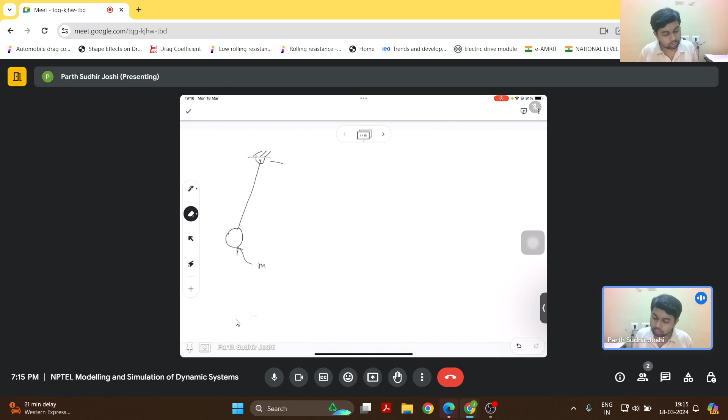Let us first try to derive the equations of motion for this simple pendulum in the most generalized form. Let us draw the free body diagram of this simple pendulum. The forces acting on this pendulum will be the weight of the pendulum and the tension acting in the rod or string by which the pendulum is suspended. Let us say the pendulum makes an angle theta with respect to the vertical. Now we apply Newton's second law to this system.

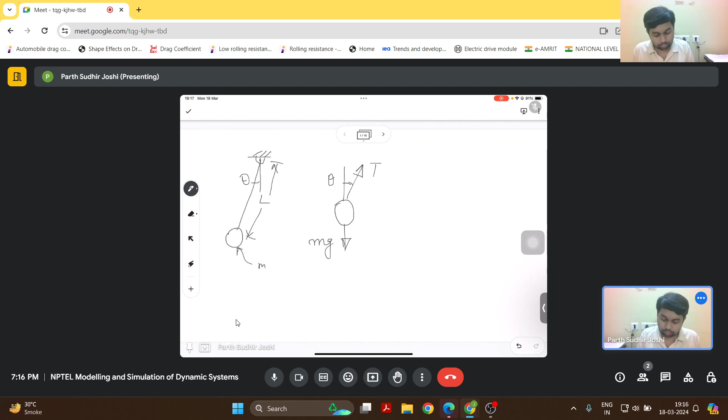So when we apply Newton's second law, what we say is that summation of net forces is basically... now see, this is the usual Newton's second law.

Now we could also apply a further version of this similar Newton's second law, where we consider the moment. So the net moment acting about a certain point is basically the rate of change of angular momentum.

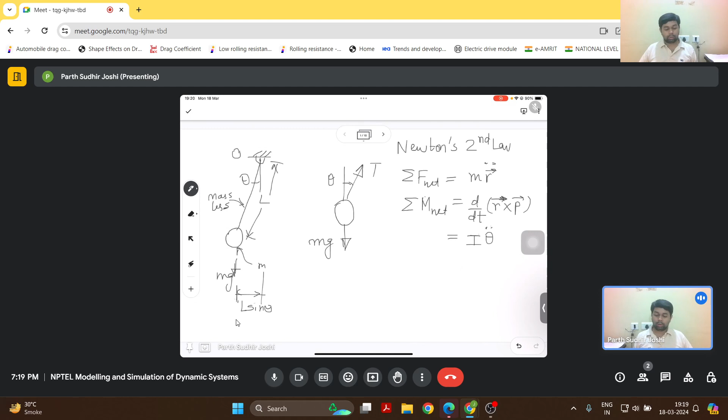So then the moment of the force mg will be basically mg into L sine theta. So it will be basically minus I theta double dot, because since our theta is in clockwise direction and this moment is in anti-clockwise direction, the signs of these both quantities will be opposite.

Now what will be the moment of inertia I about this point O? It will be basically this point mass m into L square into theta double dot. So now if we further simplify this differential equation, we get minus g by L sine theta is equal to theta double dot, or theta double dot plus g by L sine theta is equal to 0. So now this is the general form of the differential equation for this.

Now generally what we do is that we assume that sine theta is nearly equal to theta for small angles. Now this small angle approximation is in fact a linearization of this differential equation, because once we assume this to be a small angle, I'll just rewrite the differential equation now.

So theta double dot plus g by L sine theta is equal to 0, and if we assume that sine theta is nearly theta, then this differential equation will transform into theta double dot plus g by L theta is equal to 0. So then this is a linear second order ordinary differential equation. Now this approximation is valid only for small angles.

So when we linearize a differential equation about a certain operating point, that operating point is generally a certain equilibrium condition for this system. So now the equilibrium condition for a simple pendulum is either theta equal to 0, or it can be theta equal to 180 degrees. So in both of these conditions, the pendulum is in equilibrium.

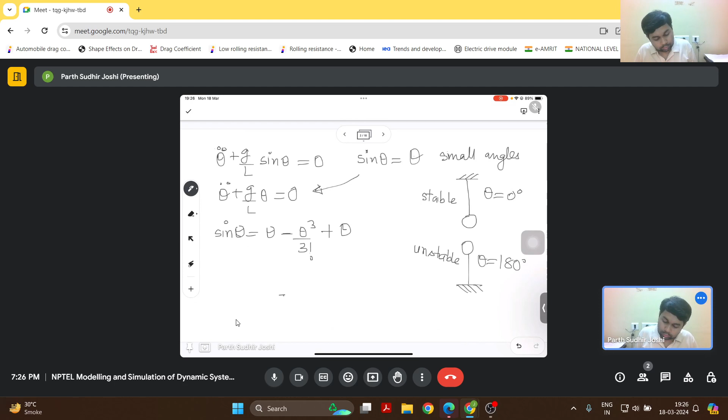So now if we write down the series for sine theta as a power series, what we get is sine theta is theta minus theta raised to 3 by 3 factorial, plus theta raised to 5 by 5 factorial, and so on. So this is the usual series that we get for sine theta. Now if we neglect the higher order terms, what we get is originally what we consider as our small angle approximation, sine theta is nearly equal to theta.

So this is how we actually get that approximation, and then this differential equation becomes linear. So that is an example of how we linearize our differential equation about our operating point. So this is one simple example which I wanted to cover, because this is something we have been familiar with since a long time. So hopefully that will help you understand this better.

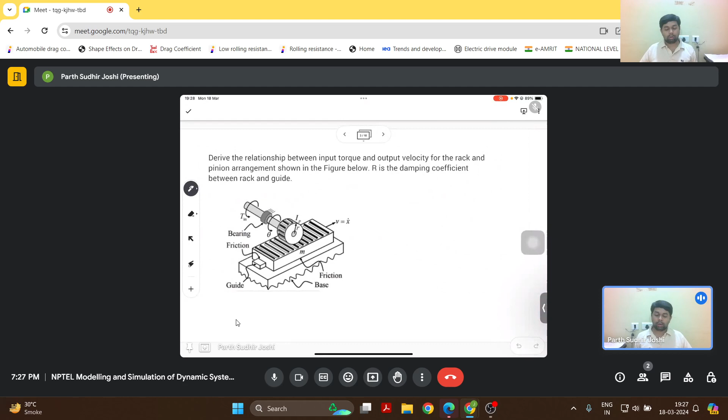So let us now move on to our next problem. In this problem we have been given a rack and pinion mechanism, and we have been asked to derive the relationship between the input torque and the output velocity for the rack and pinion arrangement. It has been given that R is the damping coefficient between the rack and guide.

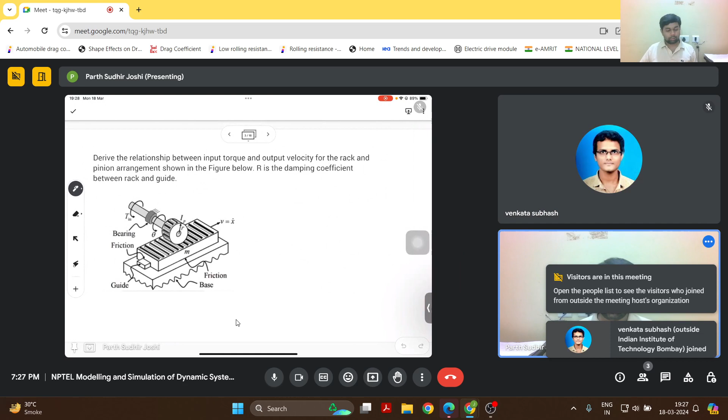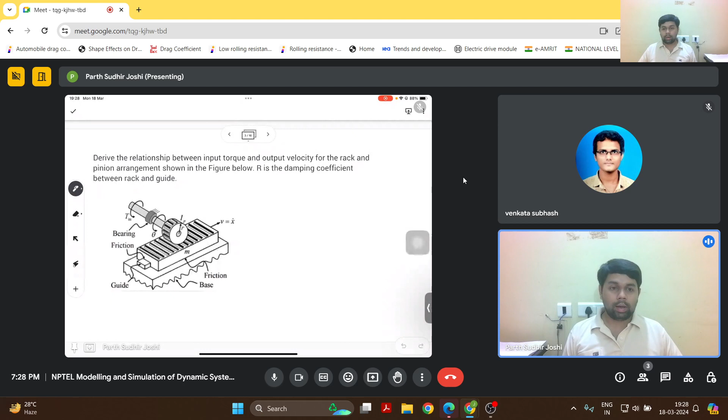Since no one had actually joined this session, I had just started with one simple problem, and I had started recording this session.

What I had covered is basically an example of a simple pendulum, and I had explained the derivation of how do we derive the differential equation for this simple pendulum mechanism, and then derive the equation in its most general form, which is theta double dot plus g by L sine theta.

Then how do we basically come to the usual small angle approximation for the simple pendulum. We may not have realized earlier, but that is in fact how we linearize that differential equation about a certain operating point. In this case, our operating point is one of the equilibrium positions of the simple pendulum. We have two equilibrium positions, which are 0 degrees and 180 degrees.

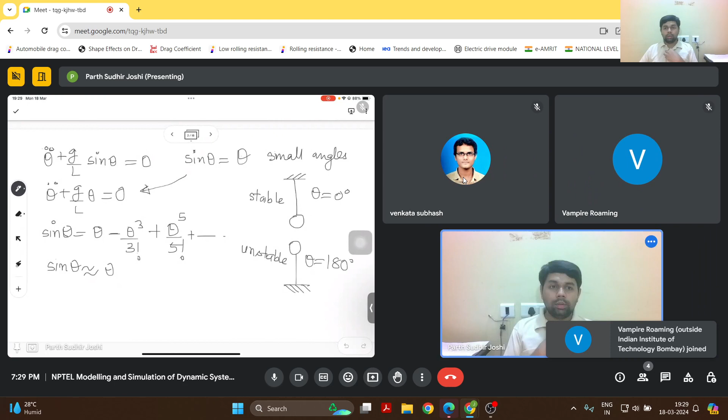One of them is a stable equilibrium position and another is unstable. We consider the case of 0 degrees as a stable equilibrium position, and if we now write down sine theta in the form of a series, we get sine theta as shown. If we neglect the higher order terms, we get the small angle approximation of sine theta nearly equal to theta, by which we now have linearized our differential equation about theta equal to 0 degrees. That is an example how we can linearize simple systems.

Sir, I have a small doubt, sir. Can I ask? Yes, yes. In the second step, you wrote sin theta is equal to theta, no sir? Which one? In the second step, sir, you have written the arrow mark. Yes, sir, which one? You mean this part here? That arrow mark. Yes, sir. Sin theta is equal to theta.

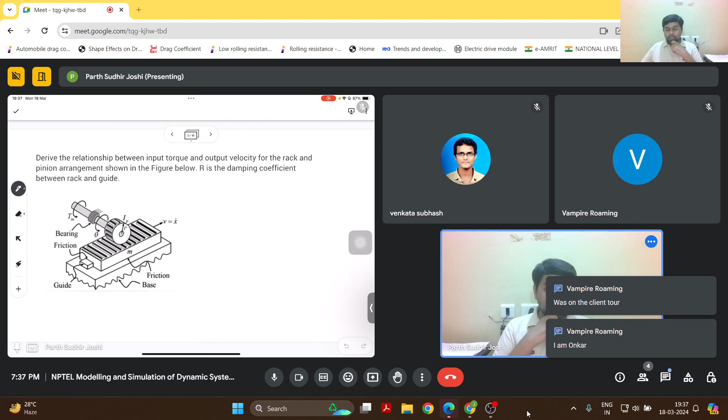So your name actually shows something like 'vampire roaming'. What is actually your name? Okay, your name is Onkar. Okay, fine. So are you a BTech or MTech, or are you a student, or working in industry?

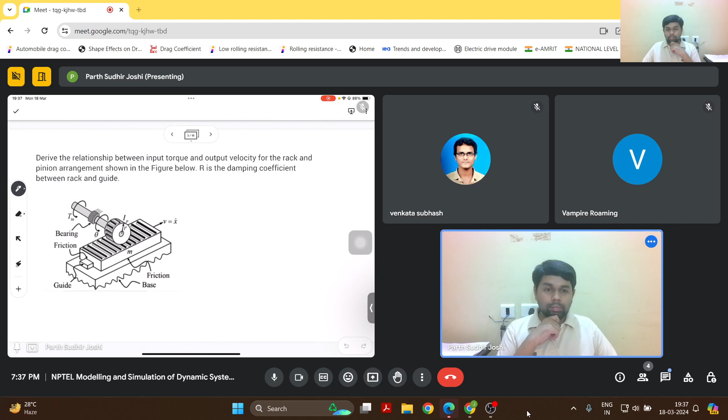So you have already done your masters in design engineering. Okay, great, from BITS Pilani. Okay fine, even I did my undergrad from BITS Pilani. And are you working in industry somewhere? You are working, okay. So you are from a mechanical engineering background itself?

Oh, last 22 years, okay great. So then you are much older than me. Okay great, so great to have you, Mr. Onkar.

And what about you? Okay, so you did your master's in 2022. From which institute did you do your master's? You just mentioned BITS Pilani, right? Sorry, yeah, thanks. So great to have you on board.

And regarding Mr. Venkata Subhash, are you currently studying or working somewhere? So you are working, okay. Have you completed your masters? So Mr. Venkata Subhash, have you completed your masters? Okay, so you are a faculty in mechanical engineering. Okay fine, so are you doing your PhD or have you completed it?

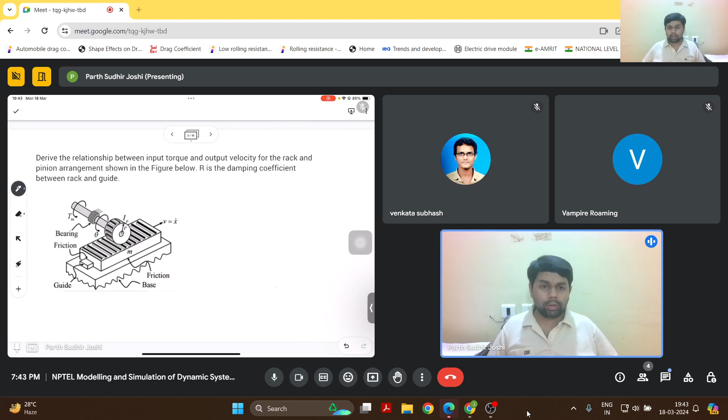Yeah, so I'll provide you my email ID, and then we can discuss separately what exactly you were not able to understand. So please go through that video. In the initial part of the video, I have tried to explain some of the basic concepts, and then some problems have been covered. Hopefully that should help clear some of your doubts, and if there are more doubts left, we can discuss separately over email.

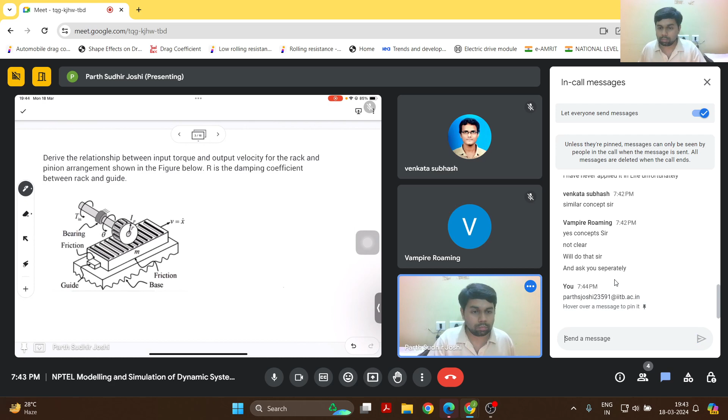So I think we might cover Simulink also to some extent later on. Right now we are just covering the basic theory related to system modeling. Towards the later part of the course, I think we will be covering some examples using MATLAB as well as Simulink. I can also separately cover Simulink and some examples if you are interested, even if that is not part of the course.

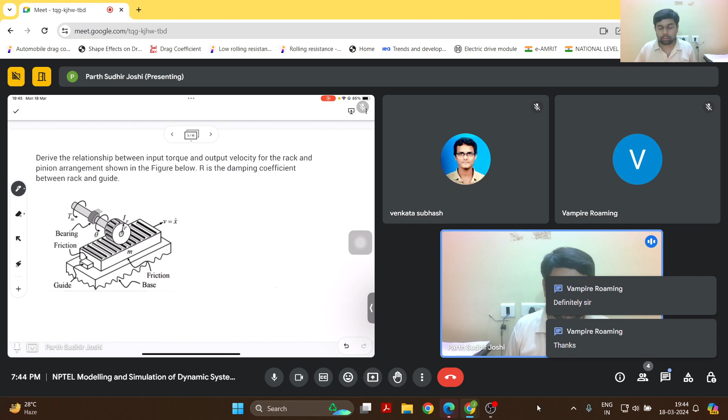Sure. Yeah, welcome. So fine. Anything else? Anyone had anything else to say?

Fine. So then we can start with this problem, which is related to modeling mechanical systems. Here we have a rack and pinion mechanism. Some electric motor is running the pinion, providing an input torque T in to the pinion, and this pinion is in contact with a rack installed over a guideway. There is friction between the guideways, so R is the coefficient of viscous damping or viscous friction between the rack and guide.

Now we have to derive the relationship between the input torque and the output velocity for the rack and pinion arrangement. So how do we start with this problem? We first consider each component separately. We first consider the pinion, find the net torque acting on it, and then apply Newton's second law. So if this is the pinion, it's given that there is some input torque T in. We also assume there is some net output torque that the pinion is able to provide.

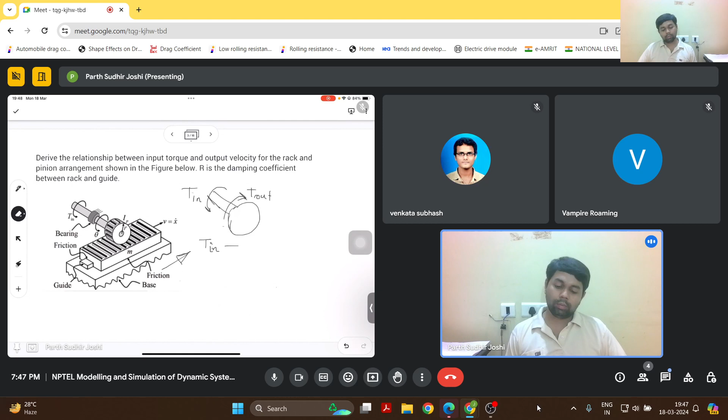So we can write down the differential equation. The direction of this output torque will be reversed, because since the pinion is pushing the rack forward in this direction, it's providing a force in this direction. As a reaction, the reaction force acting on the pinion will be in this direction, which will cause a reverse torque in a clockwise direction with respect to the axis of the pinion. So we can write down the equation of motion for this pinion.

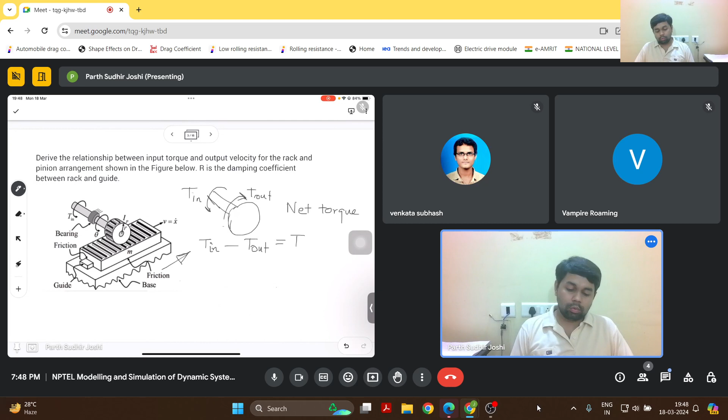So the net torque acting on this pinion will be the moment of inertia of this pinion about its axis times the rate of change of angular velocity. Now, let us say this force acting on the rack because of this pinion, let us call this F.

We can write down this force in terms of the torque applied by the pinion onto this rack. So this force times the radius of this pinion will be equal to the net output torque acting at the pinion. So let us call that force F. Now if we draw the free body diagram of the rack, so let me draw this.

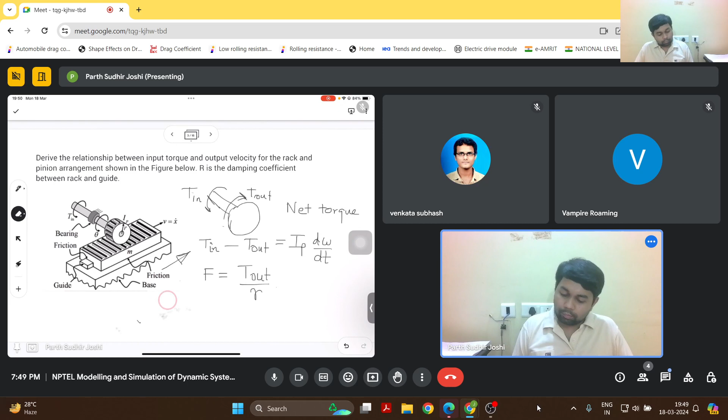So then there will be a friction force which is, since the velocity is in this direction, the friction force will be opposite to the velocity, which is basically R into the velocity v, and there is a force F which is acting because of the pinion. So there will be this force acting on the rack, and

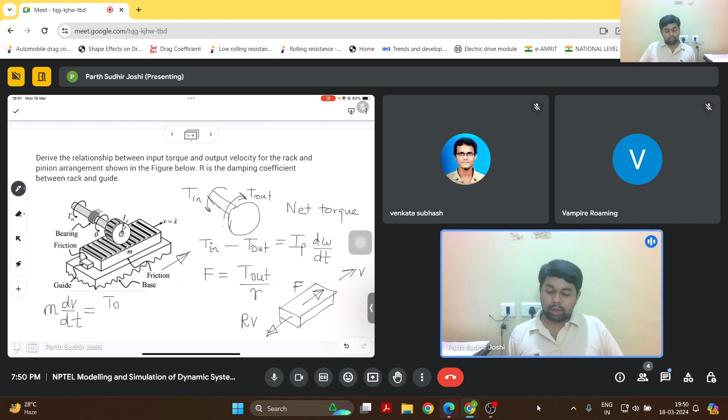let us say the mass of this rack is small m, so then we apply Newton's second law to this rack, and what we get is basically mass into acceleration of this rack is the sum of the net forces acting on this rack, which is the force F, which is T out by small r, minus R into v. So this is the equation of motion for this particular rack.

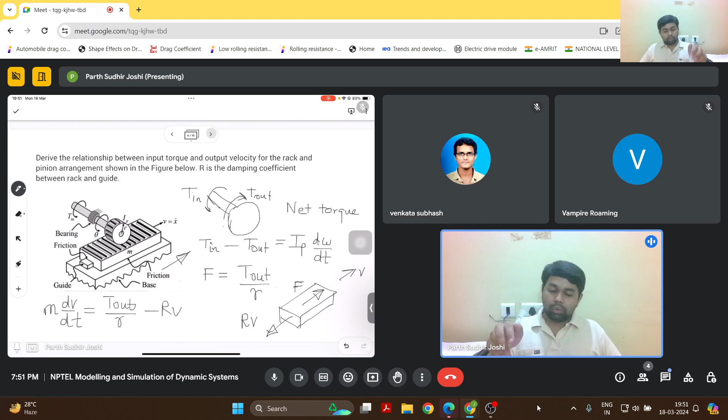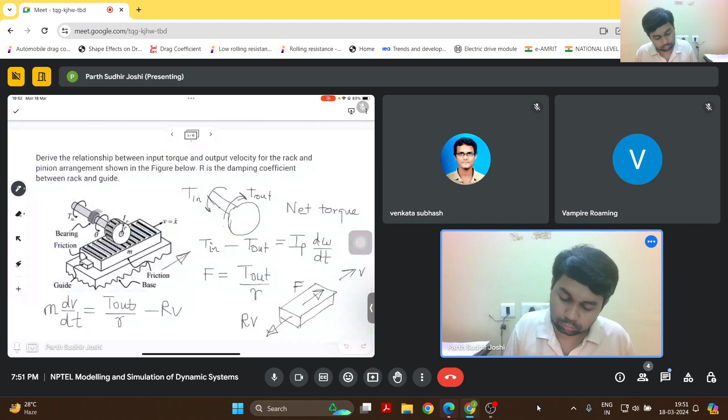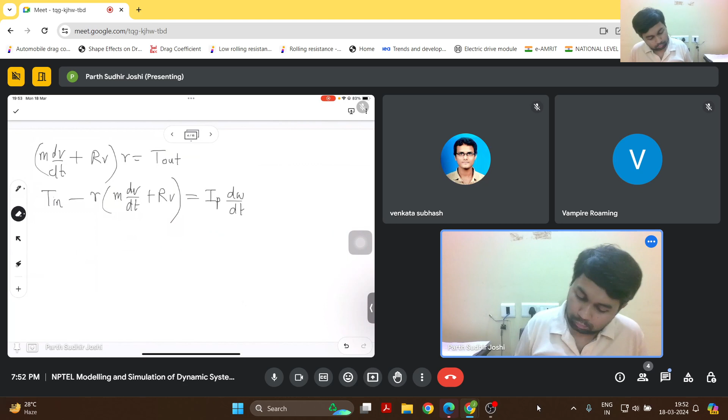So now using this equation, we can derive the expression for the torque T out. So now we can rearrange this equation. So we get this equation for T out. So now we substitute this equation of T out in this differential equation for the pinion. So we write that T in minus, so we get this differential equation now for the pinion.

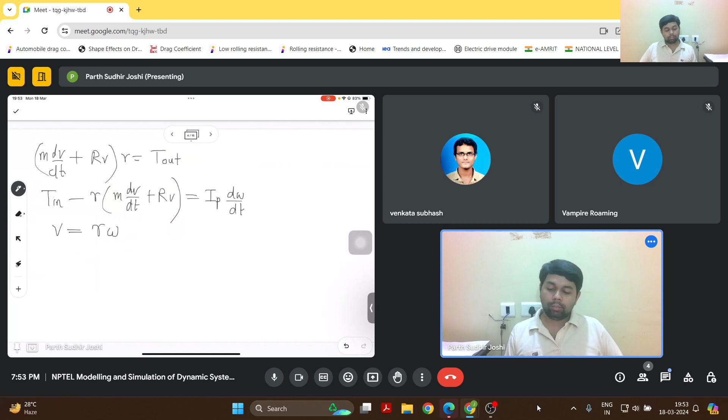Now we know that the velocity which is imparted to the rack will be r into omega. Basically, omega is the angular velocity of the pinion multiplied by its radius. So that will be the tangential velocity at the point of contact between the rack and pinion. So using this, we get that d omega by dt will be 1 by r into dv by dt if we differentiate this relationship. And if we substitute this into here, then we get that.

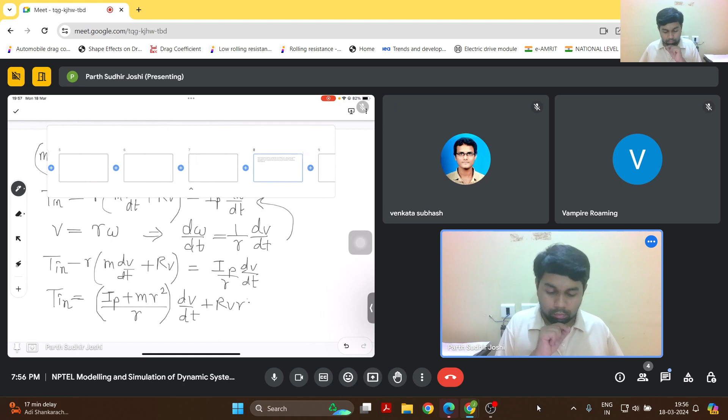So let us now move on to the next question, which is related to deriving the differential equation for a DC motor. It has been given that there is a DC servo motor. We have to derive the differential equation relating the input voltage and the output angular velocity. We have to assume that the motor is armature controlled and the equivalent circuit of the motor has an armature with just resistance. So we have to neglect its inductance.

So any idea how do we approach this problem? What about you, Mr. Venkat? Okay, fine. So let me just explain from the basics. So when we derive the differential equation for an electric motor, what we do is we try to represent the electric motor as an equivalent circuit.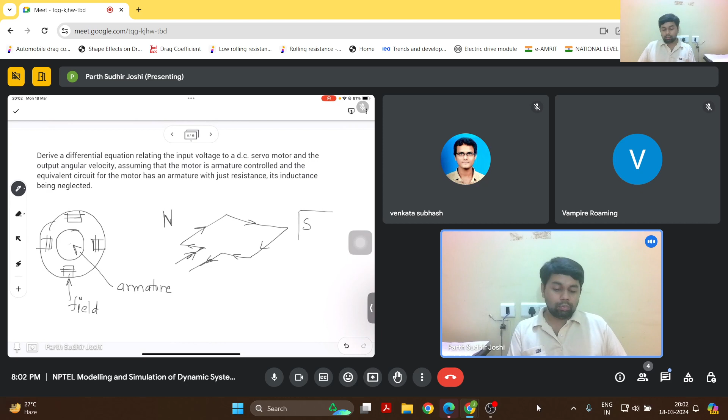And let us say there is a magnetic field. So let us say this coil is placed between the north and south poles of a permanent magnet. So let us say there are two poles of the permanent magnet. So the magnetic field we can draw like this. So we can indicate the magnetic field by this arrow.

So now we can predict the direction of the Lorentz force from this. So if we consider this part of the current carrying conductor, the direction of current over here is like this, and the magnetic field is like this. So now using the law that the force acting on the current carrying conductor is the integration of I dl cross B. So basically the cross product between the direction of the current and the vector of magnetic field, we will get the direction of the force.

So if this is the direction of the current and this is the direction of the magnetic field, the direction of the force will be perpendicular to both of them. So it will be like this. Whereas if we consider the left hand side part, here the current is acting in this way and the magnetic field is acting in this way. So now the force will act downwards.

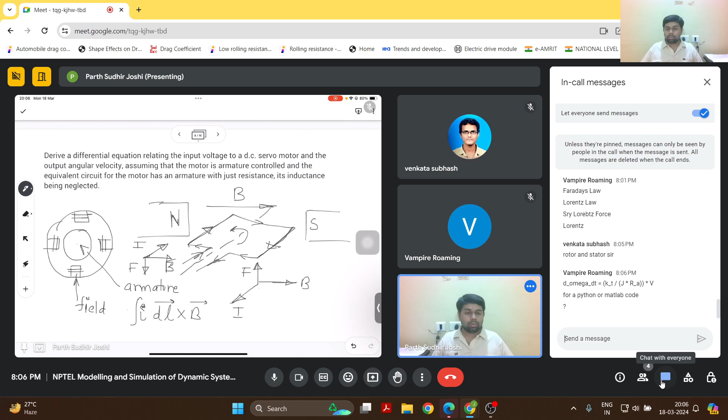So d omega by dt is Kt upon J Ra, okay. Okay, so you're already aware of that. So I didn't get your question, sir. So for a Python or MATLAB code, I actually didn't understand your question. Convert the differential equation. Okay. Okay, so we'll come to that.

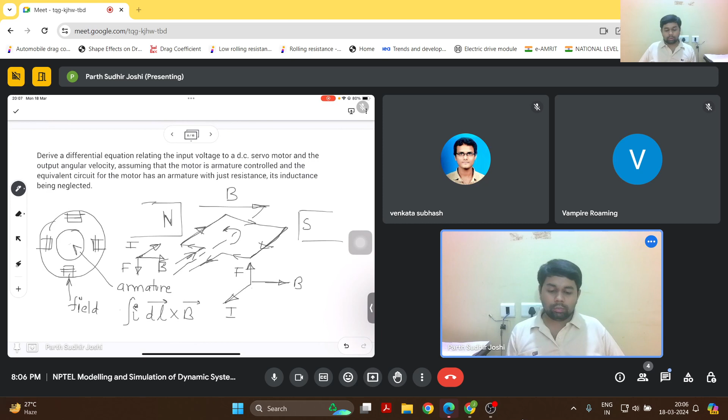So we'll just quickly write down what will be the equivalent circuit for this. Each of these armature and field windings will have a certain resistance as well as inductance. So if we draw an equivalent circuit, let us say we represent this part of the motor, basically the armature. So we indicate LA and RA, which are the inductance and resistance of the armature windings.

And this is the rotor of the electric motor. So let us say omega is in this direction and the torque generated is this way. And let us say there is some load which the motor is driving. Let us say that this load has a certain polar moment of inertia. We can call it I or J or whatever. So let me call it capital I.

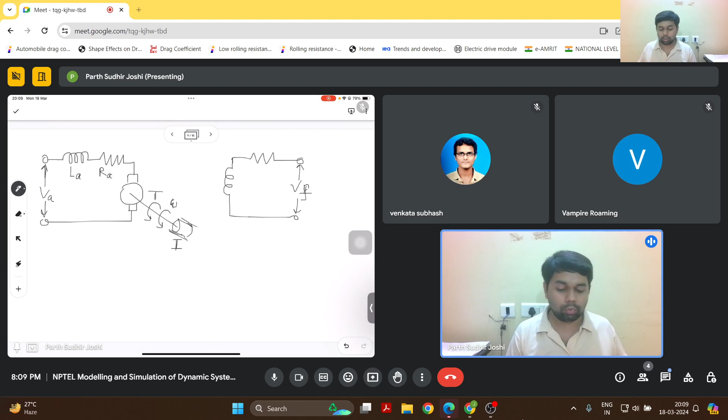So this is the armature windings part, and there will be a similar equivalent circuit for the field windings. So here for the armature, let us say VA is the input voltage applied to the armature windings, and similarly for the field windings, let us say VF is the input voltage applied to the field windings, and RF and LF are the resistance and inductance of the field windings.

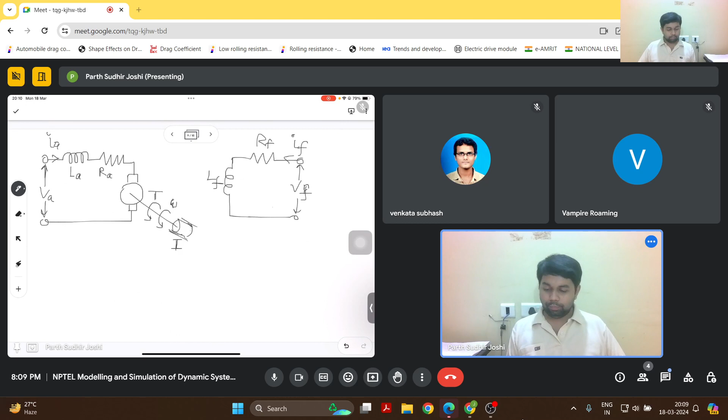So let us say the armature current we indicate in this direction, and let us say the field current in these windings is IF. So this is the usual equivalent circuit for an electric motor. We have been given in this case that the inductance is negligible.

So we will incorporate that approximation later. First we will just derive our original differential equation. And it has also been given that the motor is armature controlled.

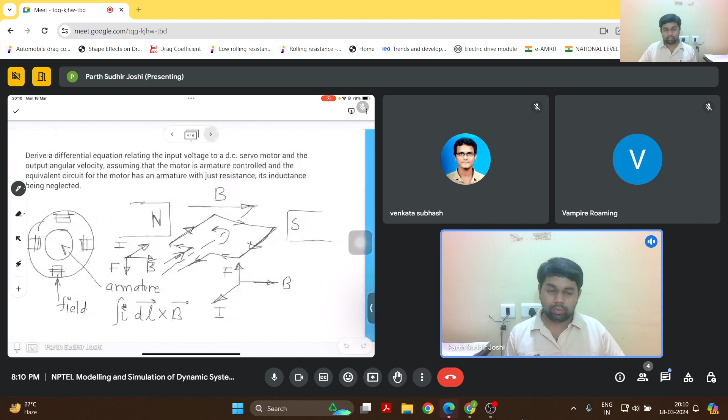So when we say that the motor is armature controlled, that means that the magnetic field created by the field windings is constant. So basically, this means that the field current is constant.

And basically the speed of the motor is controlled by adjusting the armature input voltage.

So you have raised a hand. Yes, you have some question. Venkat, you had some question.

How can you calculate the time constant? So we can calculate the time constant by basically determining the step response of this system. By measuring the damping, we'll have to go further from this problem. It's slightly different from this problem we are looking at, but we'll come to it later.

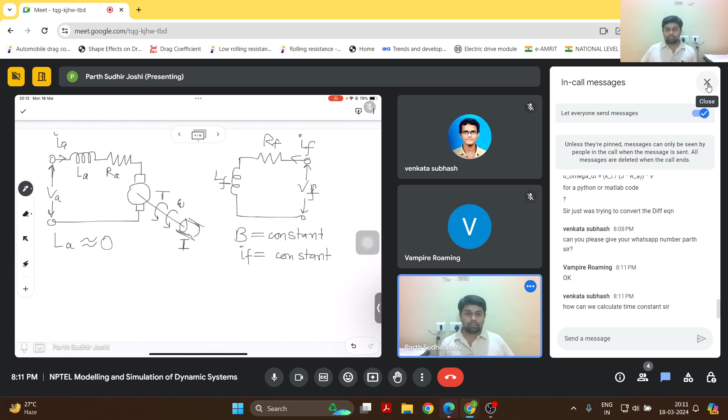Okay, sir. Thank you.

It's a servo, so it will be a control loop. Yes, so right now we are just putting the simple basic model of the electric motor. I am not looking at the control loop part exactly right now. So we are not concerned about the exact control logic for how we vary the armature voltage, etc. We are just looking at the basic model for the electric motor.

So basically, if we write down Kirchhoff's voltage law for both the armature and field windings, what we get is that this voltage VA is basically equal to the sum of the voltage drop across each of these components.

So across the motor there will be a back EMF that is induced because of the current carrying conductor placed in a magnetic field, so because of the changes in flux passing through the coils, there will be an induced back EMF, which will oppose the change that is causing it.

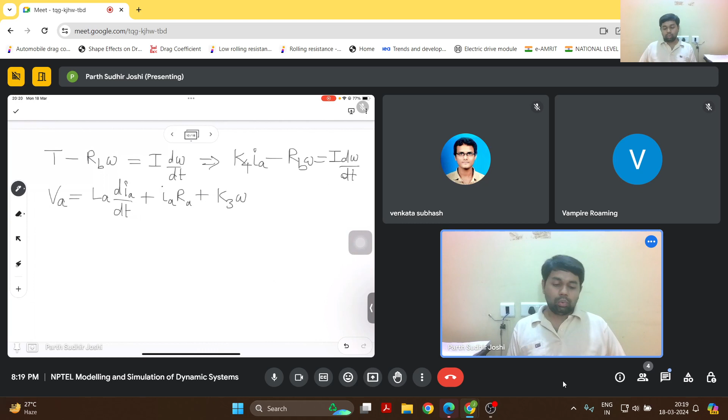So using this we get an equation for IA in terms of omega. We get IA is basically RB omega plus I d omega by dt, into 1 upon K4.

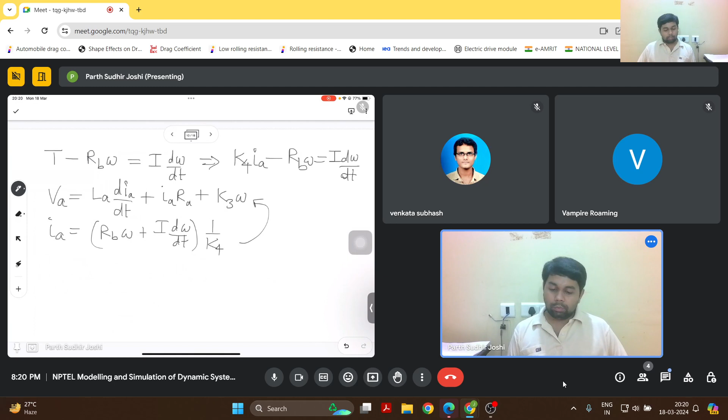And we can substitute this into the differential equation over here, substituting for IA. So we get that VA is...

So then since this has been given to be zero, this is how we get the governing differential equation in terms of the input voltage to the armature windings, and the output, which is basically the speed. So we get a first order differential equation in terms of the angular velocity of the electric motor.

So we can also further simplify and rearrange the terms over there.

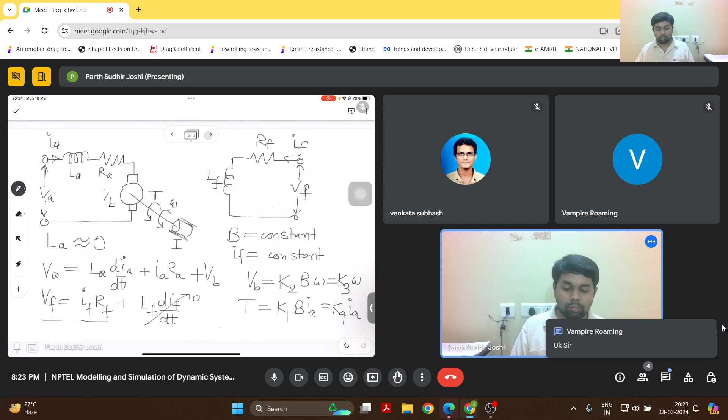So it's essentially, I think, the same thing that we would be doing. Yes. So any questions?

So if not, let us move on to our next problem. This problem is related to the flow rate through an orifice. So we know the equation for the flow rate through the orifice, in terms of the pressure difference between the two ends of the orifice, is proportional to the square root of the pressure difference. So the relation between the flow rate and the pressure difference is non-linear.

Okay, fine. So shall we? I think that will actually come into the content for the next week. The part of the step response and the time constant part is going to be covered in the next week's session. So I had not especially prepared for that part.

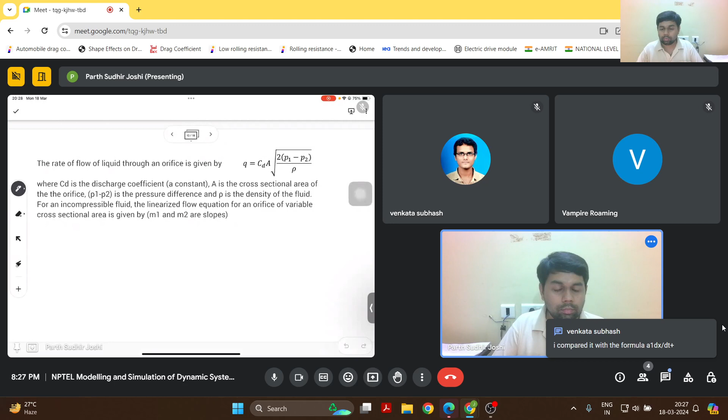So I had not exactly prepared for that part of calculation of time constant this week. Since it's already going to be covered, we would be covering that next week definitely. In the meanwhile, if you can share what exactly you have done, compared it with the formula A1 dx by dt plus...

So you compared the differential equation with that form. Okay, fine.

So you mean basically if we try to solve this differential equation, the solution for omega in terms of...

So I actually just lost my screen sharing. Let me just share my screen again.

Yeah, I think your approach is correct, that you are basically looking at the usual form of the first order differential equation and then trying to compare the coefficients and get the time constant. So I think that approach is okay. Is that what you are trying to do basically? The first order differential equation of this form, right?

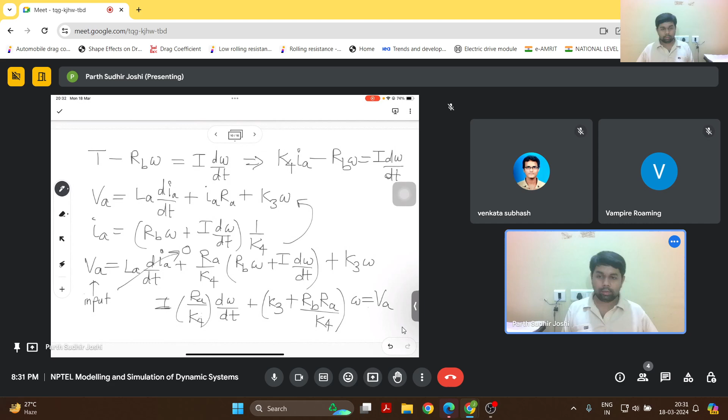So we are getting like, so if we divide by this I into RA by K4 on both sides, we will get that differential equation of the first order kind of form.

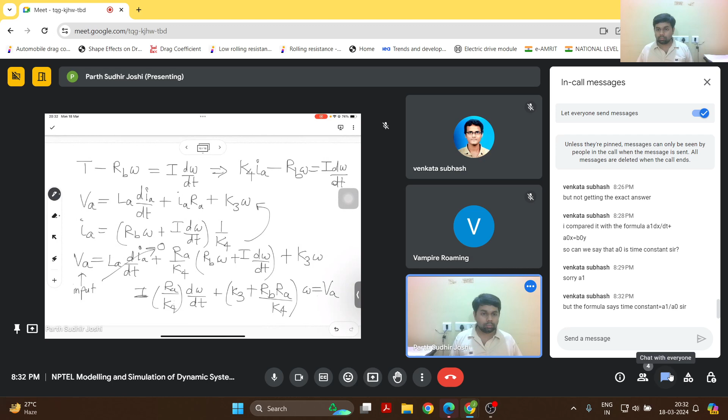I don't exactly remember the formula as such, but we can basically solve this differential equation by multiplying the integrating factor. So how do we find the integrating factor? If we have a differential equation of the form dy by dx plus some p of x into y is equal to some q of x, how do we find out the integrating factor? So we find...

So we multiply this by the integrating factor, e raised to integral p of x dx, and multiply the integrating factor on both sides, and the solution is basically this, which is what we generally get. The left hand side will be the product rule, basically the derivative of y and e raised to integral p of x dx. So this is how we can solve this differential equation. If we solve this differential equation using the same approach, we will get to the solution of a similar form.

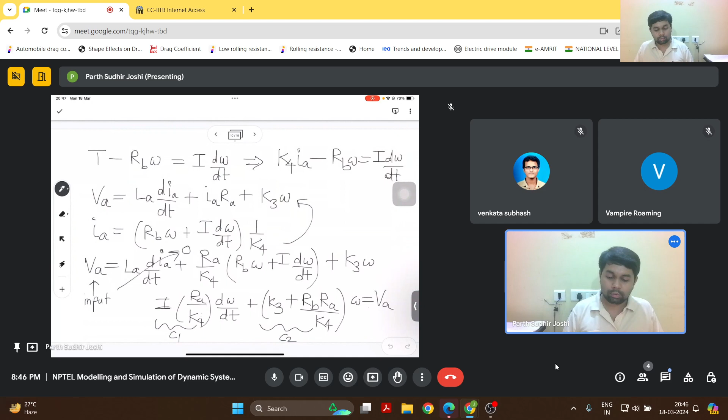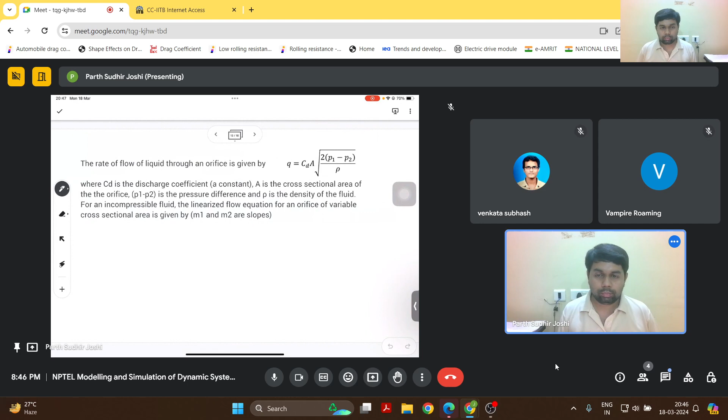Okay, fine. So let us proceed to this problem for the orifice. This is the equation for the flow rate in terms of the pressure difference. This is non-linear, and suppose we want to derive a linearized equation for this flow rate in terms of the pressure difference and the cross-sectional area, then how do we do that?

For that, we can basically take the partial derivative of q with respect to a. Since the coefficient of discharge is constant, and for an incompressible fluid the density rho would be constant, so since it's an incompressible fluid, rho is constant.

And similarly we take the partial derivative with respect to, let's say, p1 minus p2. Then what we get is Cd into A into... So this is the partial derivative that we get with respect to this.

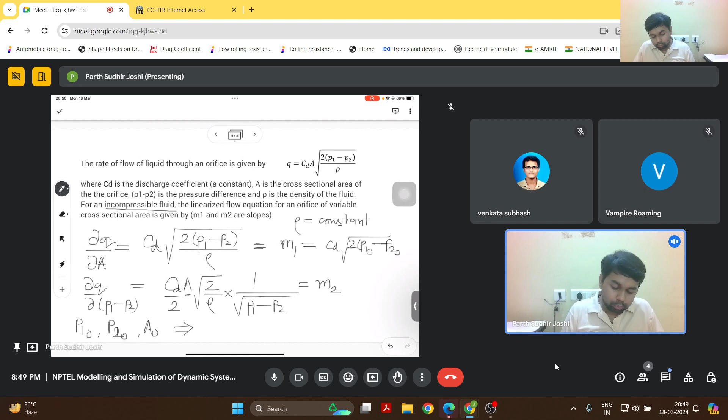So let us call this slope m1 and this slope m2. Then for the operating point, represented by the pressures P10, P20, and the area of cross section A0, we will get the value of m1, which will be Cd into square root of P1 naught minus P2 naught by rho, and m2 will be Cd into A naught.

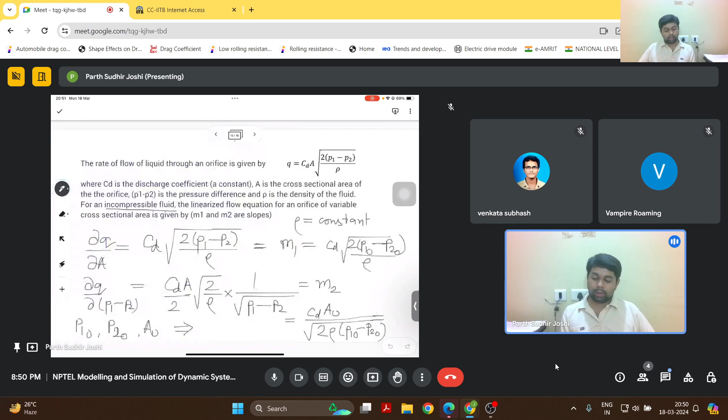Now for the flow rate to be linear with respect to both the cross-sectional area and the pressure difference, what we do is basically write that delta Q is... So if we write the partial derivative in this form, for small finite changes about the operating point, we can write it approximately like this. And for small finite changes in the pressure difference, so we can...

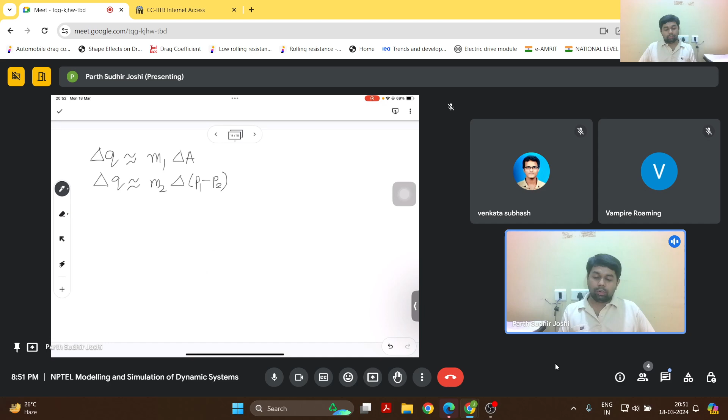Yes, exactly, that's the same thing. So if we have to combine them, we can just add both of them. We will get the expression as m1 into delta A. So the combined expression of linearized flow rate with respect to the changes in cross-sectional area and pressure difference — we get this as the final expression in terms of those slopes about the operating point.

So let us now move on to our next question. Since we are short of time, we'll just quickly go over the remaining questions. There are not many questions left, and most of them are, I think, small now.

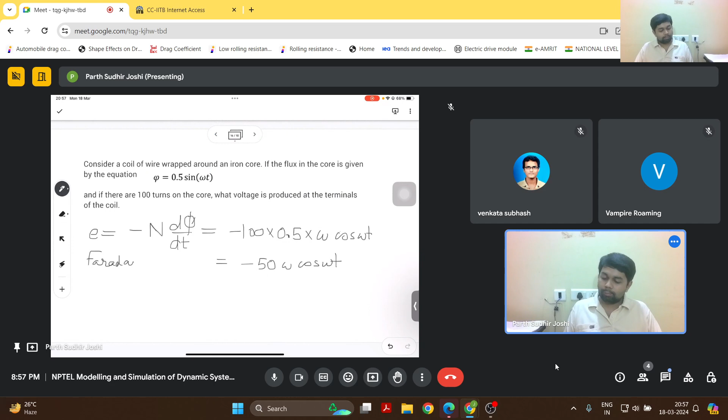Clear. So shall we move to the next question? This is basically Faraday's law. The minus sign must be there because it is opposite to the change in flux, so that's why you can say minus.

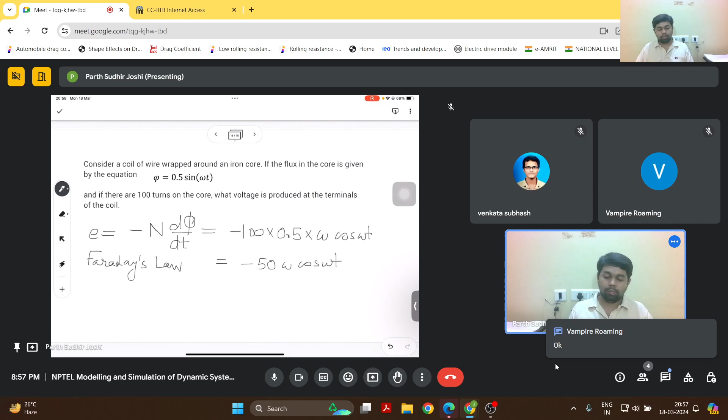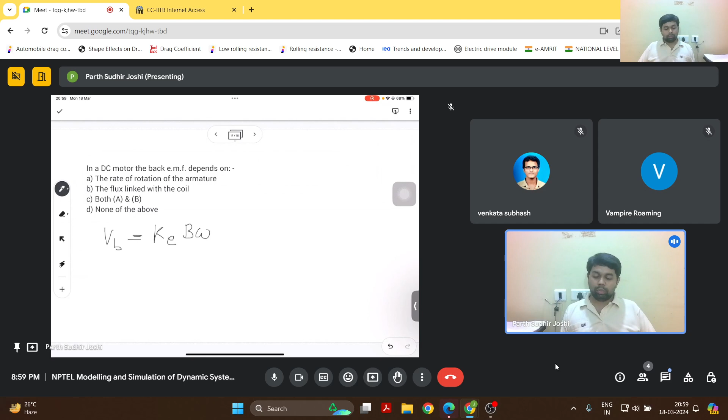So the angular velocity, that is clear. The flux will give rise to the magnetic field, and in this way it is linked with the coil. So depending on the magnetic field, the flux will be interdependent. That's how both A and B will be the answers to this question.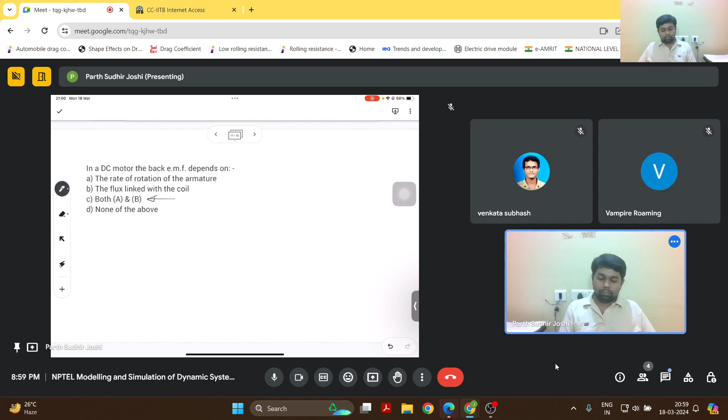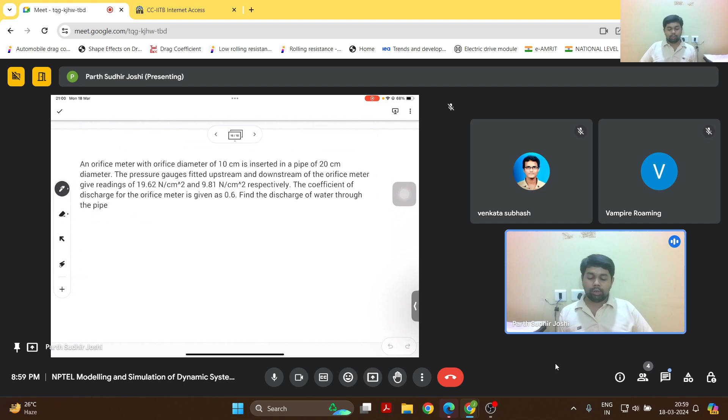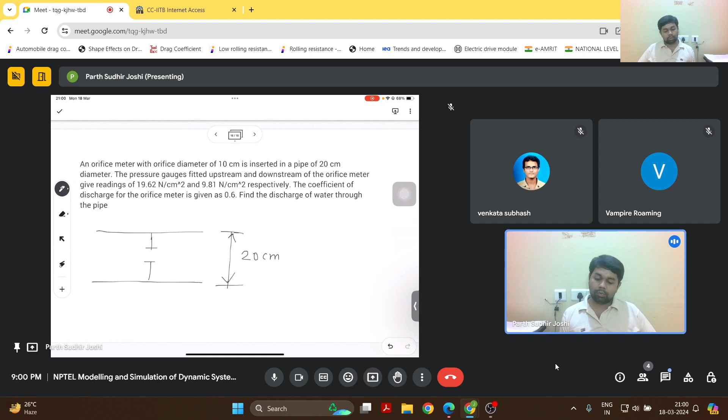So this will be our last question for today. An orifice meter with diameter of 10 centimeters is inserted in a pipe of 20 centimeter diameter. Let us draw the diagram here. So this is our orifice, this is 20 centimeter pipe diameter, and the orifice diameter is 10 centimeter.

There are pressure gauges fitted upstream as well as downstream. Let us say this is P1 and P2. P1 gives a reading of 19.62 Newton per centimeter square, and P2 is 9.81 Newton per centimeter square.

The coefficient of discharge is 0.6. We have to find out what will be the flow rate considering these pressure values. We will apply directly this equation: CD into cross sectional area A into root of 2 into P1 minus P2 by rho. Can you please try calculating what will be the value of the flow rate using this equation?

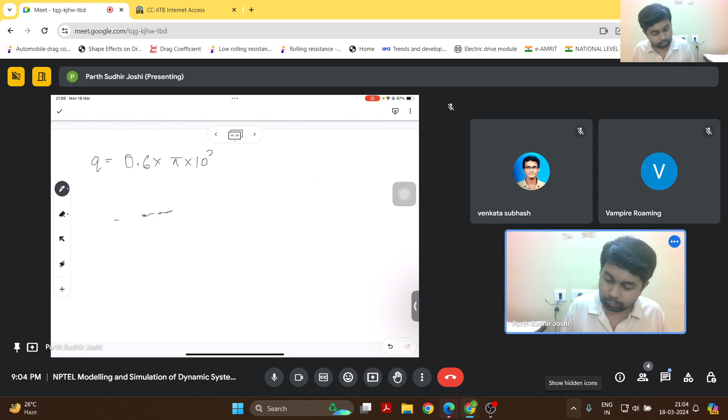So I think let us stick to SI units.

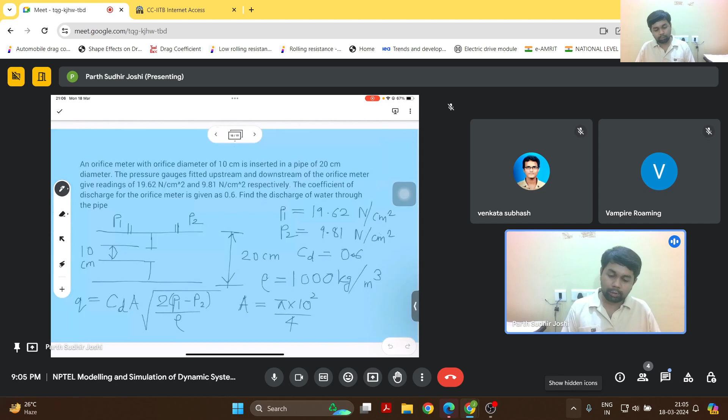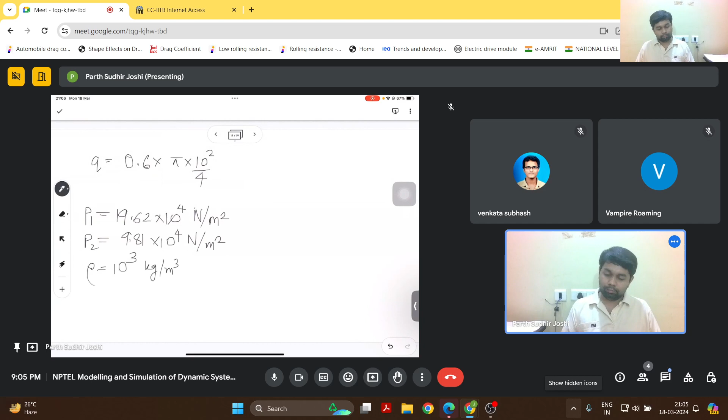So P1 is 19.62 in Newton per centimeter square. In terms of Newton per meter square, it will be into 10 to the power 4, and rho will be 10 to the power 3 kg per cubic meter. And area will be 10 into 10 to the power minus 2, squared.

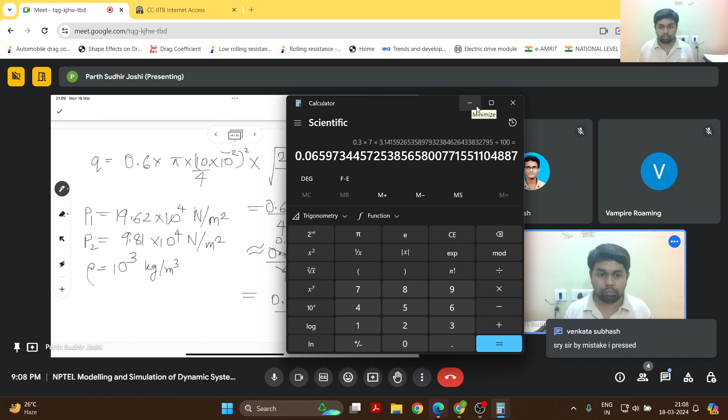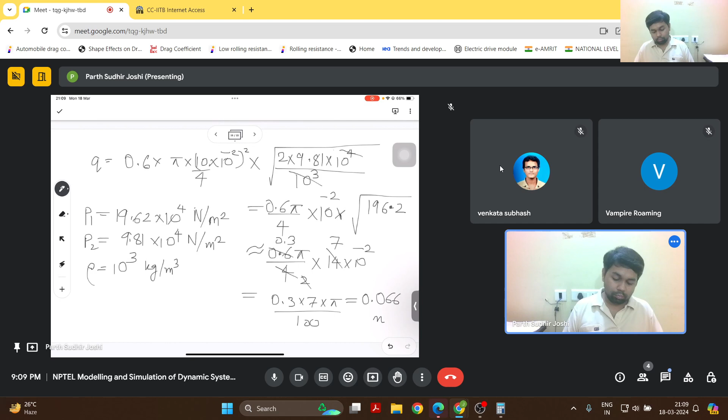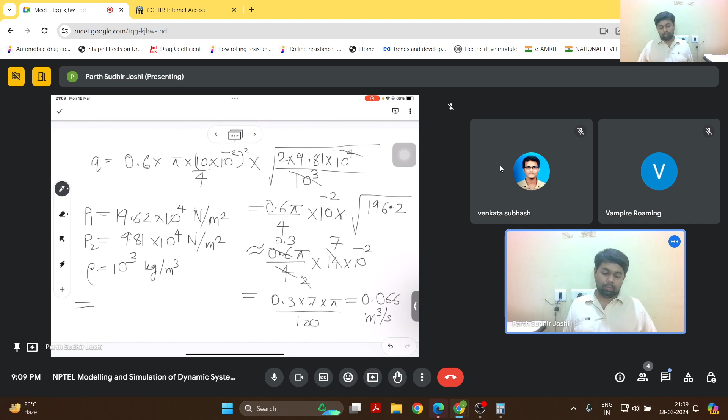So I'm getting something like around 0.066 meter cube per second, which will be 66 into 60, in liter per minute. So I think that's the answer to this question.

So these were the problems that I had for this week's content. I hope these problems have helped you understand some of the concepts. I was not able to cover the problems on the system modeling of robots part. It's a big topic in itself and will require substantial time. I will try to upload some problems on that, but I won't be covering those in today's session.